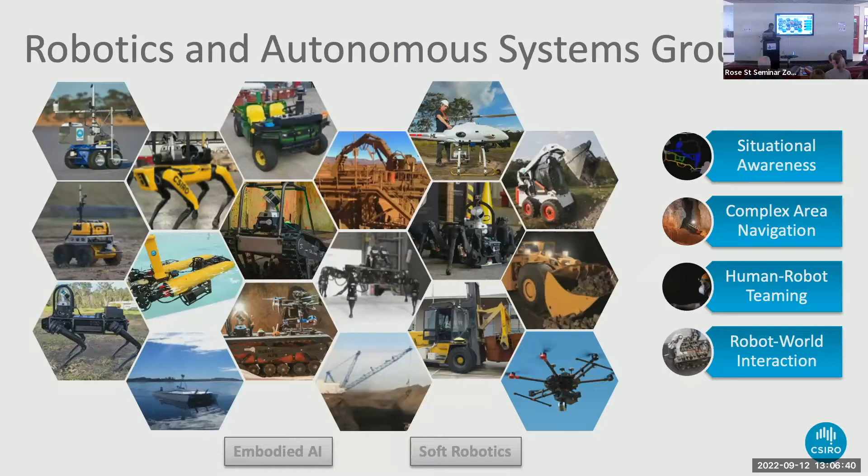So, topic of today - I'll start with explaining a little bit about what the DARPA Subterranean Challenge is for those who are not familiar, and about what we did and what we achieved, and a little bit about how we achieved all of that, and why it all matters.

The DARPA Subterranean Challenge, starting with DARPA - I'm pretty sure most of you are familiar, but I'll give the spiel that I usually do. DARPA is the premier defense research agency in the US, been around for quite a while, and known for quite some significant things. Back in the 60s, they invented the internet - I'm sure most of you have heard of ARPANET, that is before DARPA picked up the D in the acronym. More recently, in the last 2 decades, they started setting up some significant robotics grand challenges. The aptly named DARPA Grand Challenge back in the early 2000s was to send an uncrewed vehicle across the Mojave Desert. The team that won from Stanford got hired by Google, and that's what morphed into Waymo currently. So the whole autonomous vehicles industry was kickstarted through a DARPA challenge a while back.

Fast forwarding to 2017, the latest iteration of these challenges, called the DARPA Subterranean Challenge, or SubT for short, was announced. We put in a proposal and were successful in receiving funding to compete.

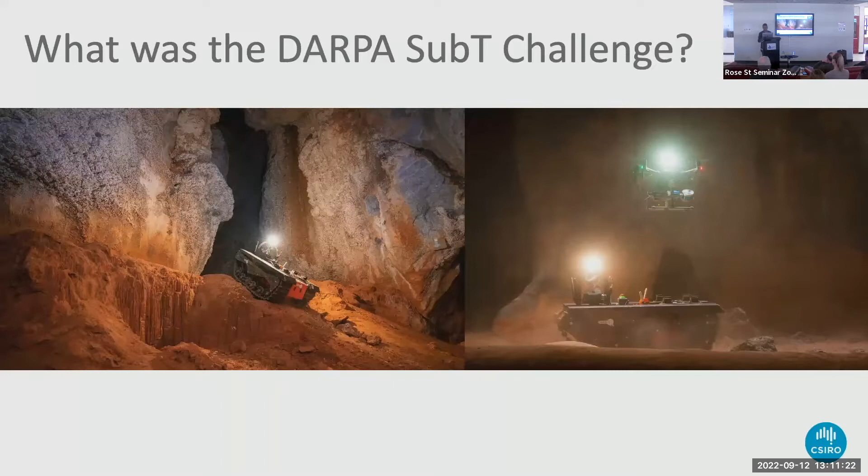So I'll play a quick video to give you an idea of what scoring a point was like in this challenge.

Here's how to win an event in the DARPA Subterranean Challenge: find the most artifacts in the shortest amount of time. When or if a team system locates an artifact, it has to report not only the type of artifact but also its spatially referenced location to an accuracy within 5 meters. A valid report earns 1 point, but teams are granted only a limited number of reports, so they can't just guess until they get lucky. Sound easy enough? Think again. Teams have to send their systems through dynamic terrain, over, under, and around obstacles, in austere navigation conditions, pushing the limits of their endurance, and in conditions degrading sensing capabilities and severely constraining communications. Teams will be permitted multiple timed runs through the course, but between each run the course can be changed — obstacles added, passages blocked or unblocked, and artifact locations changed. So teams need to be agile, adaptive, and accurate if they want to emerge victorious in the Sub-T Challenge.

So that gives you an idea of what was required. In terms of the environment, they divided it into 3 subdomains: first was man-made tunnels, like mining tunnels; second was underground urban environments — any built environment like a subway system, sewer system, or other industrial infrastructure underground; and the third was natural caves.

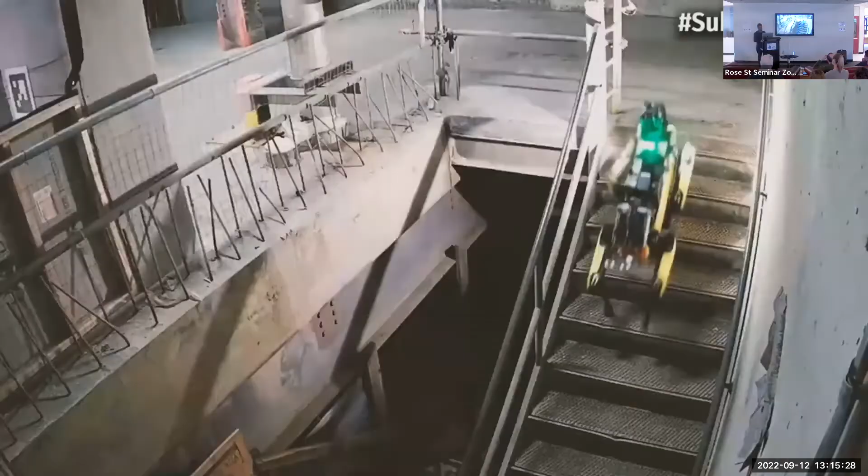We're in the Louisville Mega Cavern because it gives us a wide open canvas to paint our vision of what the Sub-T Challenge final event is supposed to look like, which is a mashup of 3 different subdomains: tunnel, urban, and cave. Each of the circuit events was focused on a particular subdomain, and that allowed teams to really zero in on what technologies work for that subdomain. The final event is about putting all of that together, bringing it into an integrated capability in that epic grand finale course. I should also mention they had 2 tracks, the systems track and the virtual track.

We participated in the systems track, where physical robots were deployed. The virtual track was all based on simulation. Some teams who participated in the systems track also participated in the virtual track, which we didn't.

What was interesting in the virtual track was that they had a series of different virtual environments, and teams had to deploy robots and perform well in each of the different scenarios. In the final of the virtual track, there was some Australian representation, not by us, but long ago, using our technology, we scanned the Jenolan cave system in New South Wales and made that dataset public. DARPA actually used that dataset to create a natural cave environment for the Sub-T virtual track, so all the teams from around the world sent their robots virtually into the Jenolan cave. Just pretty cool.

And to our team - this is just a subset of our team. We partnered up with 2 other institutions. Emesent, a drone autonomy company that our lab spun out about 3.5 years ago, based in Brisbane, provided drone autonomy. We also partnered with Ron Arkin at Georgia Tech in Atlanta, Georgia. As you can see from the list, the majority of the capability came from CSIRO, while Georgia Tech worked with us to develop a multi-agent coordination system.

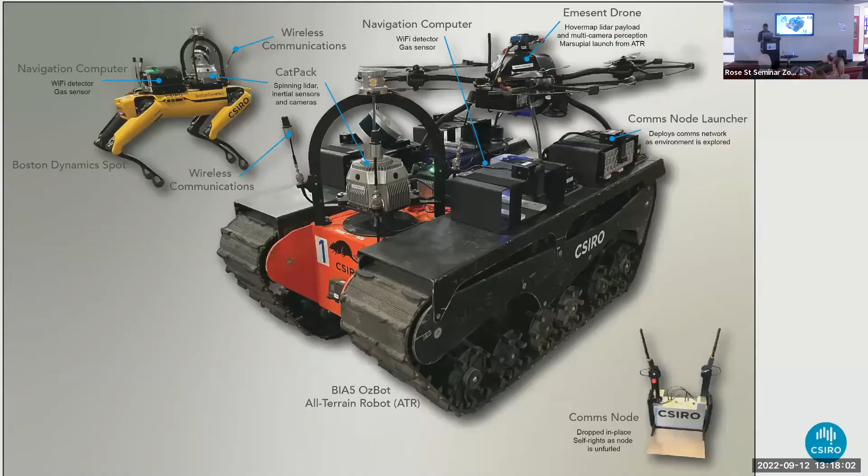This slide shows a little more of the hardware setup used. Each of the ground robots had the same autonomy and sensing payload, what we call the cat pack, with a spinning Velodyne and 4 RGB cameras at the base. That's where our SLAM system runs, processed in real time, including visual object detection. We also had carbon dioxide detection, Wi-Fi and Bluetooth detection, all incorporated into the system.

The other thing we had was droppable communication nodes, shown at the bottom right. These nodes could be carried on the back of the larger track robot - each could carry 4 of them to try to maintain a communication backbone as you enter the course. This video shows deployment of a comms node. Not very elegant, but if you wait, you see what happens: after a time delay, the ground plane opens up and the antennas pop out. Then you would have seen the drone being deployed from the back of the track robot as well.

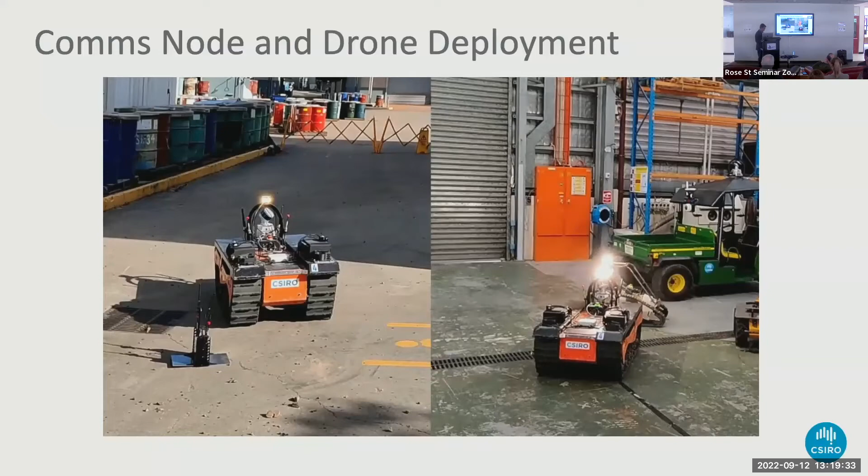So we competed over the 3 years. We got into the finals. We were all raring to go. But then due to COVID, CSIRO decided that it wasn't safe to send CSIRO staff over to the US in September last year, which was quite devastating for us, but that's what we had to deal with.

So within a very short period of time, we had to come up with a backup plan. We shipped our robots, and we had to train our subcontractors to use our robots. Mainly the Emesent crew was based in Brisbane. They weren't dealing with any of the UGVs at that time. They were only dealing with the drone part of the whole team of robots.

And then we got staff from the CSIRO US-based office. We have an office in California. It's not a research lab, it's mainly marketing and partnership staff, but they were really enthusiastic. They wanted to come and help the team, which was great. And then we were also fortunate to have a couple of our lab alumni who currently work in the US, who took leave from their day job and decided to come and help us, which was good as well.

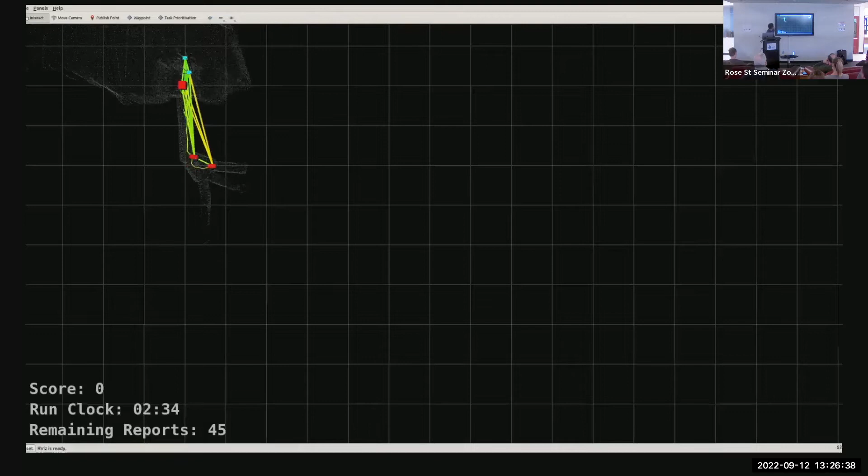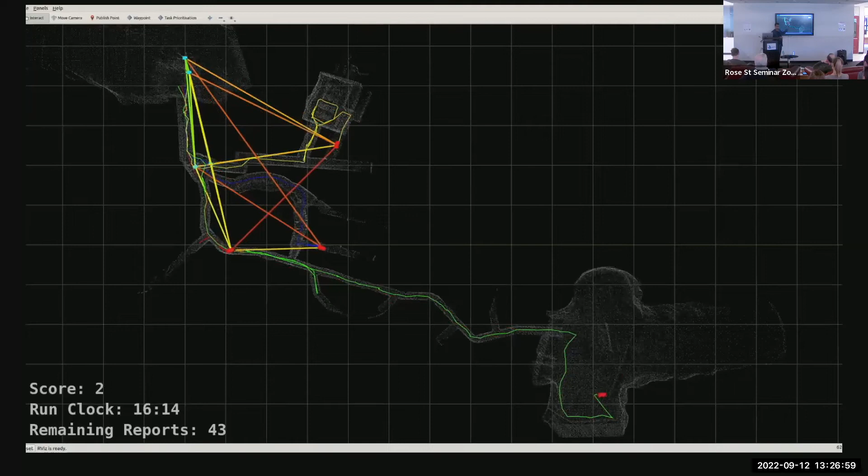Early in the phase, you'll see one of the legged robots, Bingo, making good progress into the course. But then it loses communication, and it's on its own doing a beyond-comms exploration mission. As far as the human supervisor is concerned, he has no clue what the robot is doing - as far as he's concerned, the robot is lost. But it's doing a pretty good job exploring the large cavern.

So this is the cave part of the circuit. The middle part is the urban, and the other one was the tunnel circuit. So this is a view from the base station.

Bluey - I do apologize for Bluey being yellow, which confuses things as well - but you'll see Bingo green in this view. So what about the physical scale, for example how far across? Each cell is 10 meters.

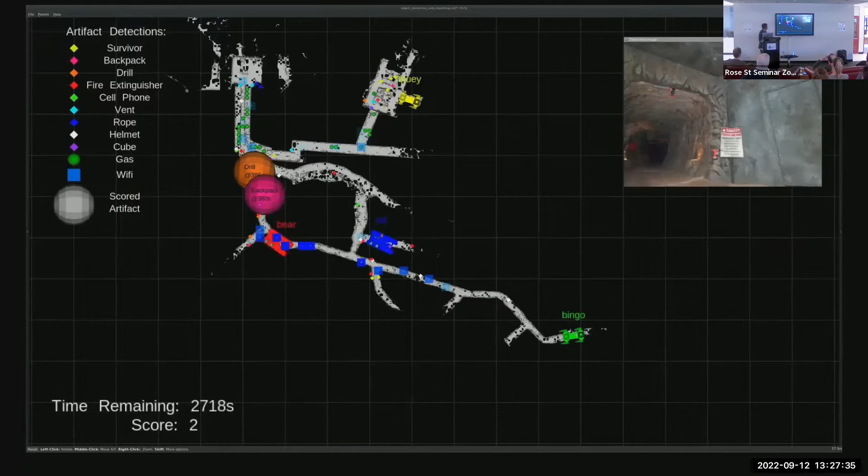So at this point, that's all the information the base station had received. Comms lost - as far as the human supervisor is concerned, he doesn't even know that part of the course exists. And this is what Bingo was actually doing.

This is from a DARPA camera that we received later on. It comes to an unfortunate end there.

It's beyond comms, but it has a lot of valuable information that it had collected - it has a bunch of detections. So that's where it is.

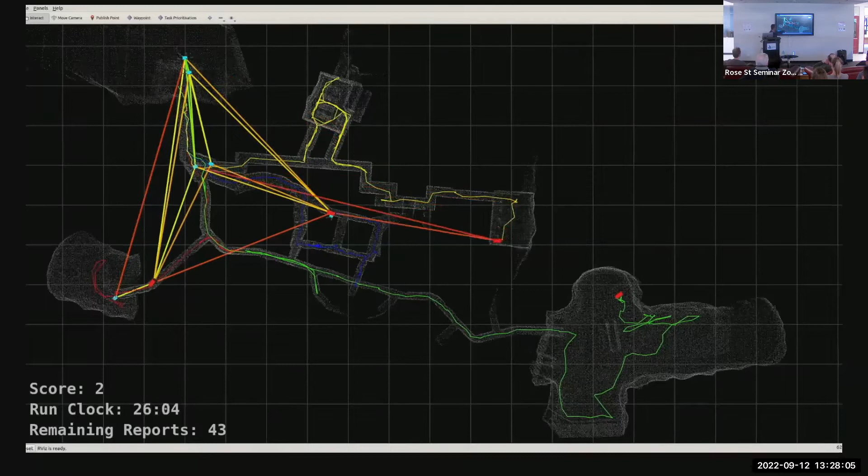And now that is Bluey, again beyond comms, doing a fantastic job exploring a subway station there. You'll notice something interesting happens with Bluey - very briefly it connects to Bingo, and then connects back to the base station. And suddenly we get all these circles back, and we now know that part of the course exists.

In the meantime, one of our big tracked robots, pardon the pun, got detracked on a rail track. So it's immobilized, it's blocking the path as well. It's got a drone on the back, and the drone is useless at that point as well.

Now, Bluey had met Bingo, collecting all the data, and makes a valiant attempt to get back to comms. But unfortunately, that too slips and falls beyond comms. At this point, we only have one mobile robot, which is Bear, which has a drone on the back.

At this point, the human supervisor knows where the disabled robots are, so he's desperate to send a robot to mule the data back. But this robot has a drone on the back, which makes it too large to fit through the narrow passages of the caves. So that's why he has to send Bear over.

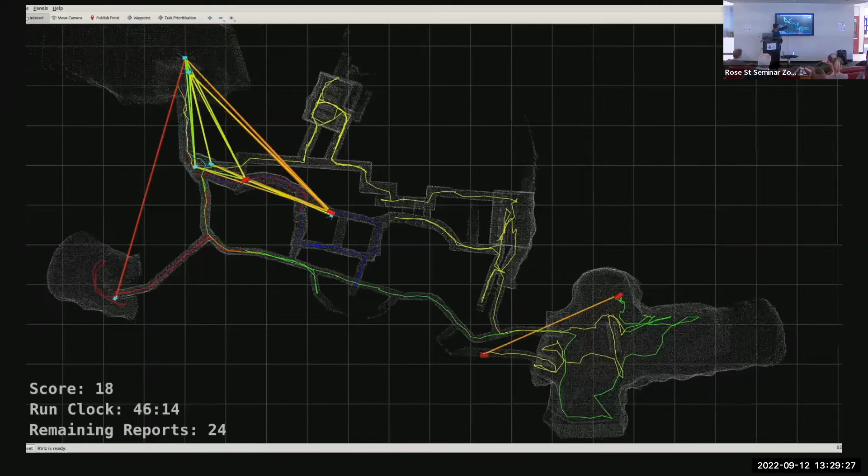So he tries to go through there, can't go through because Rat is blocking the way. Needs to come over here instead, because that's another large cavern, to deploy the drone and get the form factor small enough to fit through the narrow passage of the cave circuit.

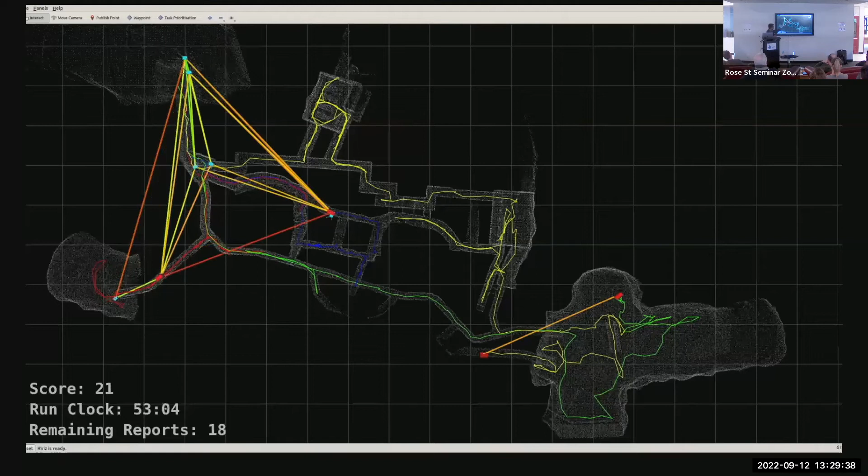And look at the time - we got less than 3 minutes at that point. It connects back and connects the data back to the base station. And we score the last point with 25 seconds to spare.

So you see the comms connectivity again. And this is the last minute at the base station. We got a pit crew of 10 who helps set up the robots, but after the setup time, when the timer starts, only one human supervisor, that's Brendan there, he's connected to the robot.

So look at the time. Notice around 25 seconds remaining, you'll see the score going up. And the other bit about the number of attempts, there were a total of 40 artifacts, but they only allow you 45 attempts, so you can't keep guessing. So we scored 23 points with 13 reports to spare.

What they didn't know at this time was we just tied for the top score. Because the teams are sequestered, the team didn't know what the top score was at that time. We knew because we were logged in from Brisbane.

And what was very frustrating for us is that we had 4 more accurate artifacts that were still streaming, which obviously we couldn't score. We had enough attempts left. So if we had another minute, not even a minute, maybe another 30 seconds, we would have scored 2 more points.

So I'll show you another video. This is from the GoPro footage on the 4-legged robots, just to give you an idea of what was going on and a sense of what the course looks like. So this is Bingo exploring beyond comms. And this is one of the special artifacts I didn't mention, called the DARPA cube. It was a glowing perspex cube to mess up any visual color-based object detection because it would change color constantly.

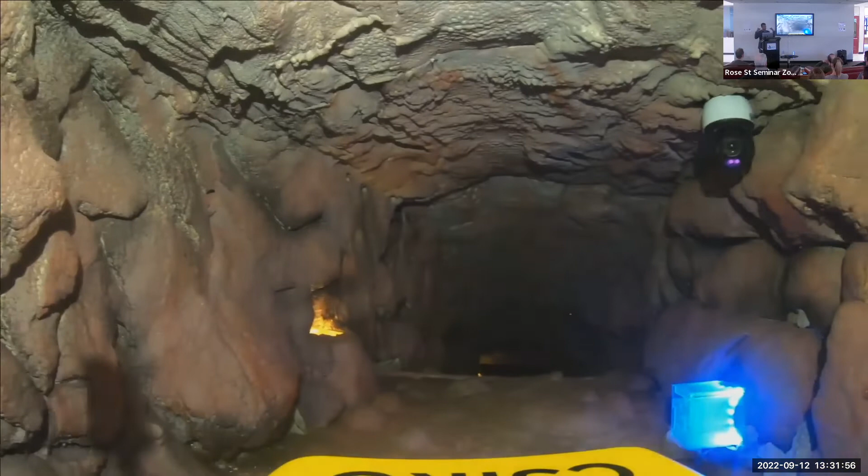So this is an autonomy behavior that we program into the robot. If our traversability estimation sees a gradient below a certain number of degrees, it'll turn the robot around and walk backwards. That's due to the morphology of the legs of the Boston Dynamics robots, because it's more stable going down a slope backwards, including stairs.

And this is a longer sequence of what you saw earlier. It actually digs up a power cable that DARPA had buried. I don't think DARPA intended for anyone to do that. It almost tripped, but didn't.

And if you notice, that's actually water, real water dripping down. And these robots are not IP rated, by the way. So we were pretty lucky that we didn't get water in any of the wrong places at that time.

As you can see, this is pretty challenging terrain, even for a human to walk on. And those robots are remarkably capable in terms of what they are and what they can do. And you'll see it struggles quite a bit before it comes to its sad end.

Because we didn't do anything with the low-level foot placement planning or the trajectory planning at the lower level, that's all Boston Dynamics. So what we did was at the higher level, we did our local path planning, global path planning, and the traversability estimation. And we managed to pipe the low-level sensors of the robots into our LiDAR-based map so that we could do seamless planning from near field to far field.

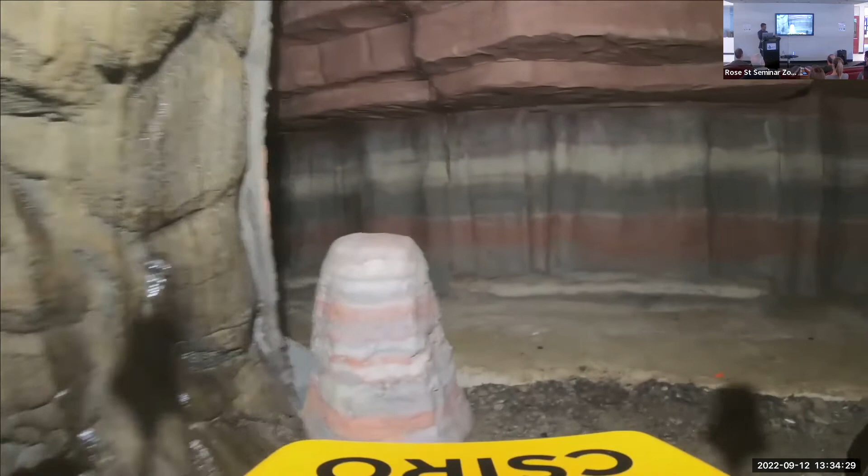And now this is Bluey. What, I mean, what was actually damaged? It wasn't damaged per se. It had the capability of standing up once it falls, but we intentionally disable that behavior because in some cases it would end up knocking the LiDAR around, and we didn't want to risk corrupting the map by having that self-right behavior.

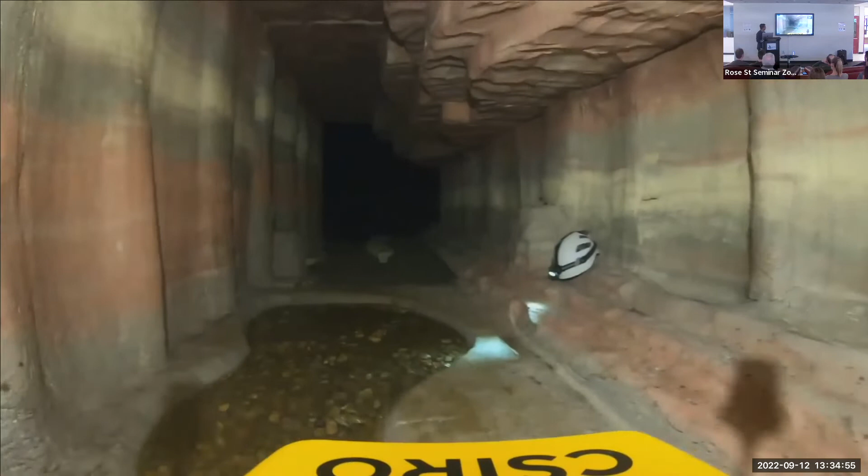Now this is Bluey, going through a puddle of water filled with pebbles. I think that was put in there to try and mess up LiDAR-based perception. Luckily, our SLAM system didn't seem to mind. And that's an artifact, that's the helmet, that's the type of stuff that we're supposed to detect.

And something pretty cool happens. If you observe, you'll see a bright light towards the left here. That's Bluey seeing fallen Bingo for the first time. So that's the light of Bingo, and that's that raised lip that it had fallen from.

And now this is Bluey valiantly trying to come back with all the data that it collected from Bingo. You'll see how difficult this terrain is. Notice the floor, it's not flat, it's sloped and slippery as well. And that's another rope, that's another artifact that we detected. And this is not someone joysticking the robot, this is fully autonomous traversal.

Yep, that's end of Bluey as well. Mind you, this is all man-made.

Just to give you an idea how good it was, DARPA spent over 3 years, $82 million US running the challenge. So they didn't spare any expenses doing this.

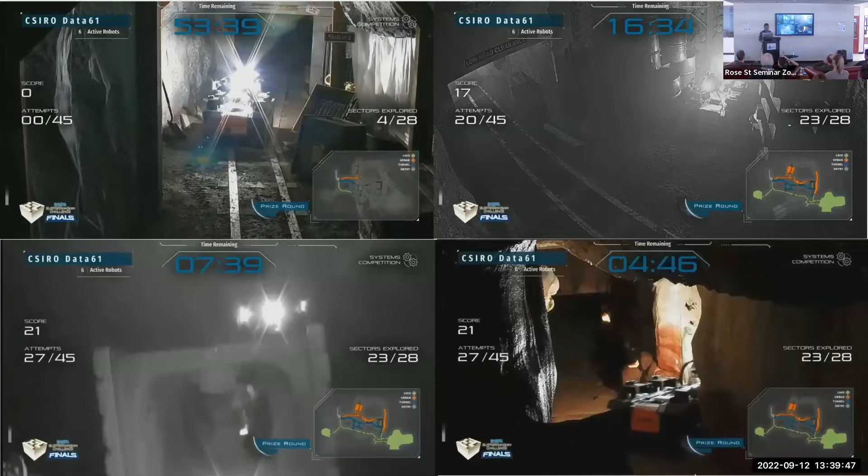Early in the piece, score 0, one of the robots going in. Score 17, that's where Bear was trying to go through, Brad was blocking the path, and that's another dynamic obstacle. That's something I forgot to mention, DARPA also had dynamic obstacles. So when a robot goes through a particular path, they had these things that would fall behind and block the path. It's not exactly trapdoors, but similar. And they also had a wire mesh that would act almost like a Faraday cage to block communication going through, as well as smoke machines. So when robots entered certain parts of the course, they would trigger the smoke machines and fill the whole segment with smoke. Yeah, they were nice to the robots.

And this is where score 21, 7 minutes to spare, that's when Bear launches the drone to get the smallest form factor to fit through the narrow gap. At this point, this was waypoint navigation with the human supervisor, just less than 5 minutes to spare, with the drone off the back, trying to get the robot as close as possible to the other robots. While it's being driven, you see it's throwing out a comms node as well as it goes.

The commentators that DARPA had there, they had some sports commentators commentating. There's another piece falling off the robot as it flies past. It was quite good.

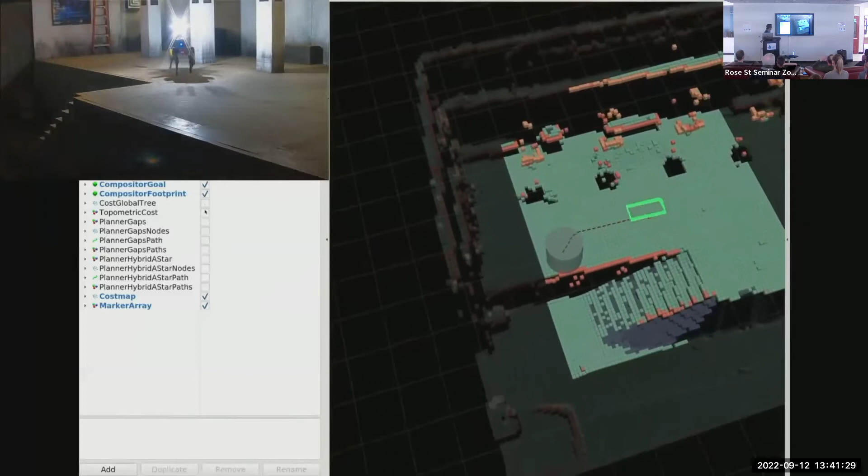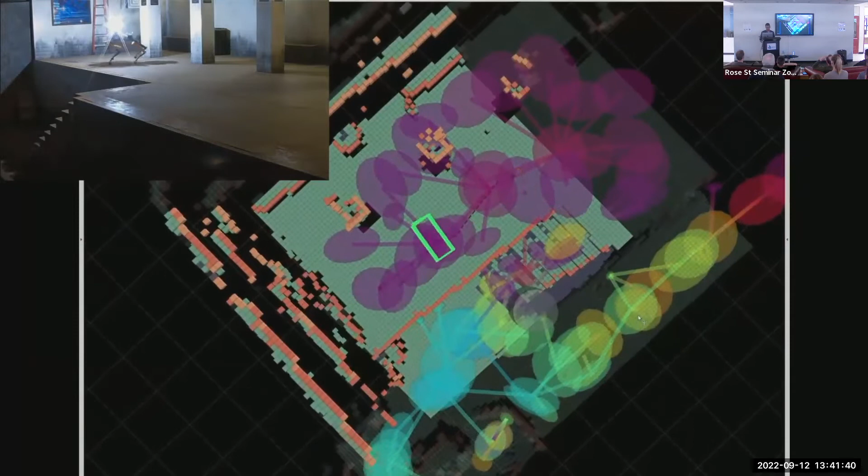And here we are turning on our topometric cost, or the cost-to-go map. This is coming from the global navigation graph that we have, and that shows the color. The color represents the cost to go from the current location to any one of the nodes of the graph. This is while doing a fully autonomous exploration mission. And here the robot turns around so that it can go backwards down the stairs, as I mentioned earlier.

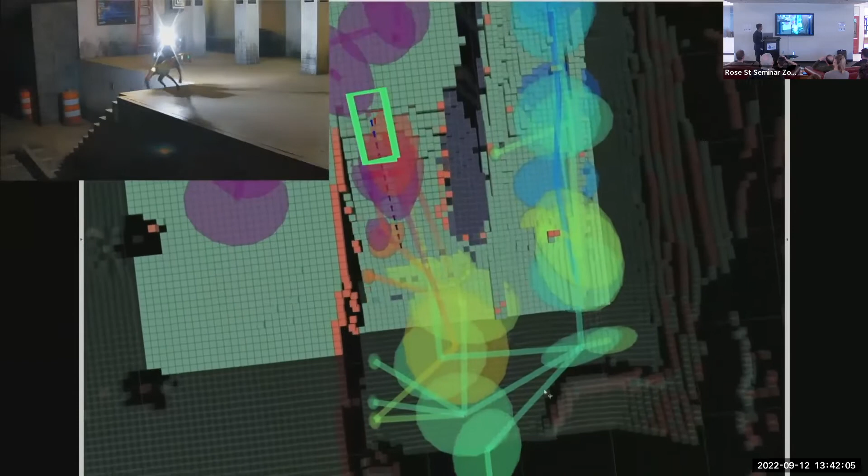So you see that it detects the edge of the steps as fatal, so that it doesn't plan across that.

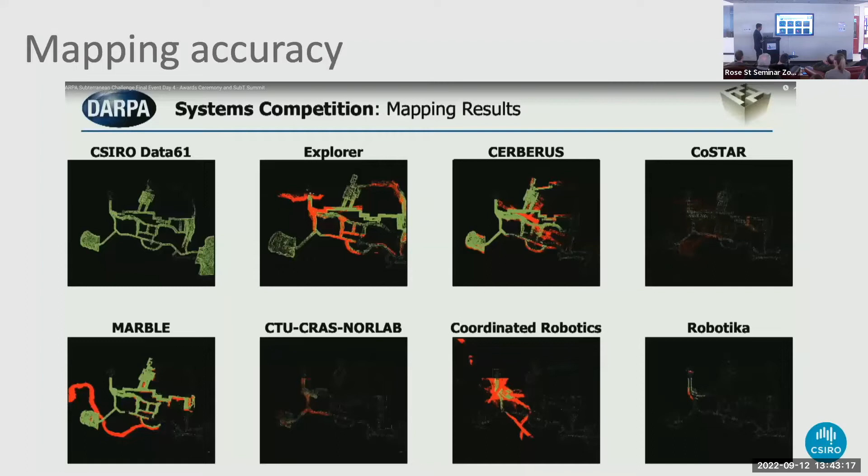And what this enabled us was also to win a superlative award for the most accurate artifact report. Here the error was 4.8 centimeters. To put things in context, we would have still scored that point if the error was 500 centimeters, because the allowed tolerance was 5 meters. So we were two orders of magnitude better than the requirement in this case.

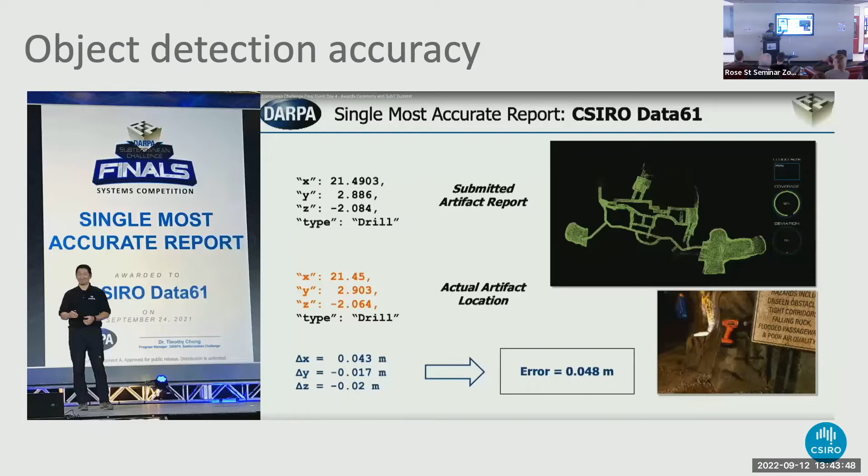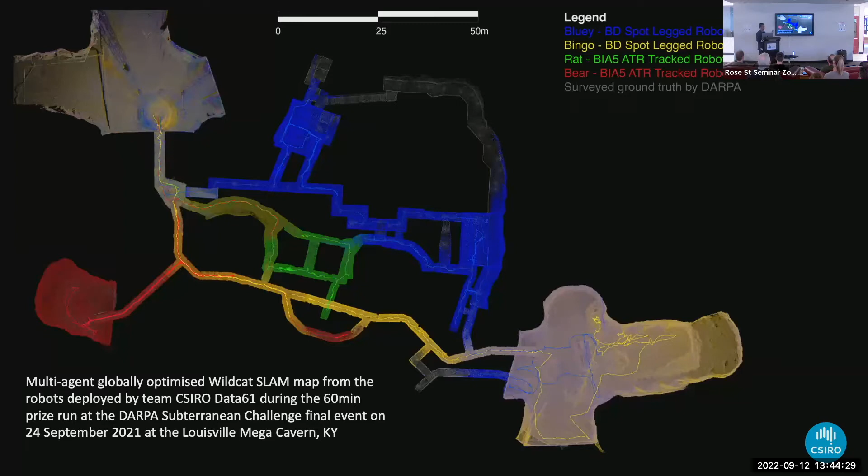And this is a 3D fly through of the same map. What was interesting was a few days after the competition, I got a call from a company called Leidos, a fairly large defense contractor in the US. They're the ones who've been contracted by DARPA to do the ground truth survey of the course. They told me that they spent more than 100 man hours surveying the course to get the ground truth. So they were asking, how in the world did you guys do it in less than an hour with a bunch of robots? Which was a good call to get.

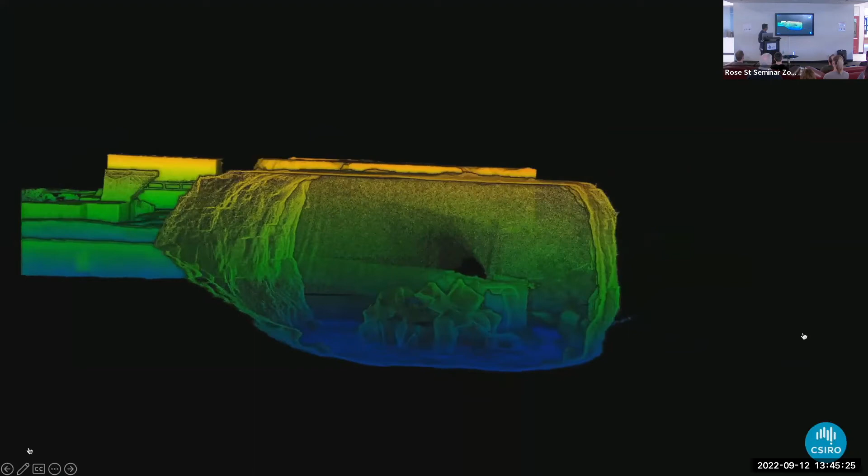Something that we also did was we colorized the point cloud in real time on the robots. But due to communication bandwidth constraints, we didn't send it back to the base station. So this is not photogrammetry - this is a LiDAR point cloud colorized with the RGB cameras that we have on the robots themselves. Each of the robots are doing it in real time, and that information was available in real time, but because of bandwidth constraints, we decided not to send it back to the base station.

Because in that way, we could actually very clearly see the artifact locations as well. Is the artifact identification just visual, or is there a particular criteria or multiple criteria? Mostly it was visual, but there were some artifacts like carbon dioxide concentrations and mobile phone detection using Wi-Fi and Bluetooth. So we had to have those additional modalities, but majority of them were detected using RGB.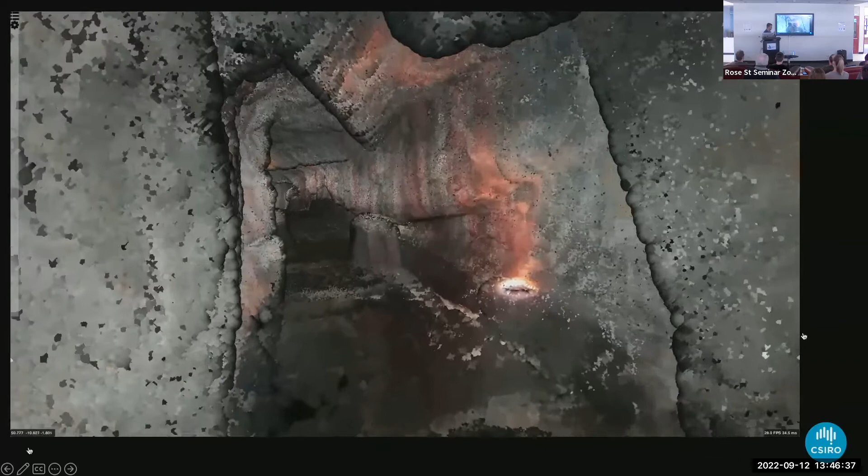We didn't use the point cloud to detect the artifacts per se, but we used the SLAM-based localization to do tracking of the object to improve the accuracy of the object detection. Because each robot would have multiple viewpoints of the same object and multiple robots might see the same object. The architecture we had was once an object is detected, the report will be sent back to the base station and the human supervisor has a chance to verify that before sending it to the DARPA scoring server - then we immediately know whether you scored a point or not. We didn't want to bombard the human supervisor with tens and thousands of detections, so having that object tracking really helped us prune down the number of candidate object reports that were coming through.

The CO2 identification is an interesting one - I guess you have to integrate it with some kind of sensor. Yes, so we used a CO2 sensor, but that too we used tracking because we had to keep track of the concentration going up. So we made the decision where you get the peak of the gradient, that's where you would report.

So the rules meant that they would have carbon dioxide released in an enclosed area, and as the location we had to report the center point of the entrance of that area. So if it's a room, we had to report back the location of the door if you detect CO2 in a room.

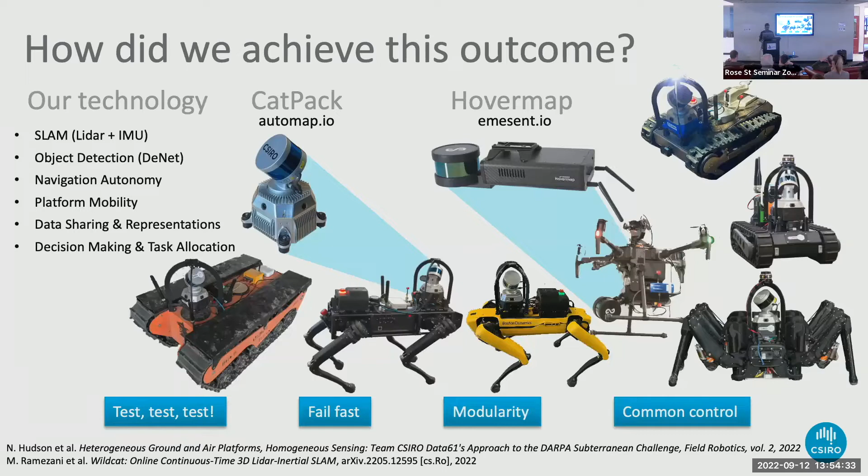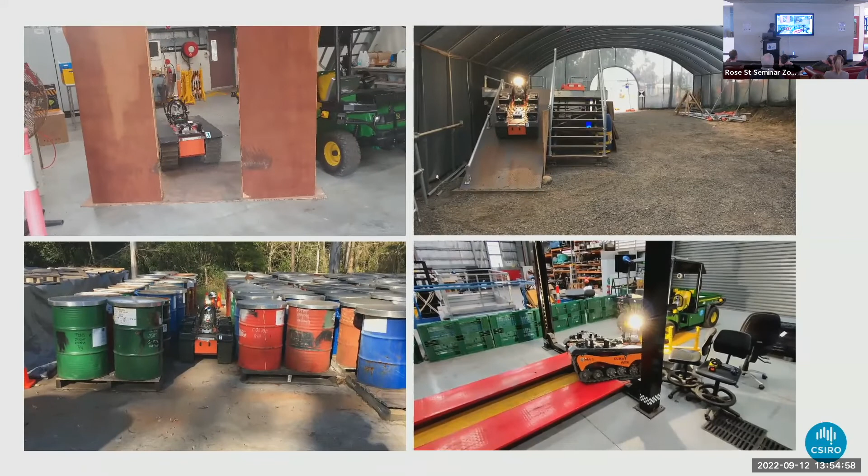In terms of testing, we are lucky to have a really great site up in Brisbane, which has a fair bit of industrial setting there. We also built 300 meters of shade cloth tunnel just for the purpose of testing our robots for sub-T. These are the environments where we did our testing.

This is fully autonomous, going through a narrow gap. This is something that I'm very fond of—having a robot go through a narrow gap with 2 centimeters tolerance on each side. That was pretty special.

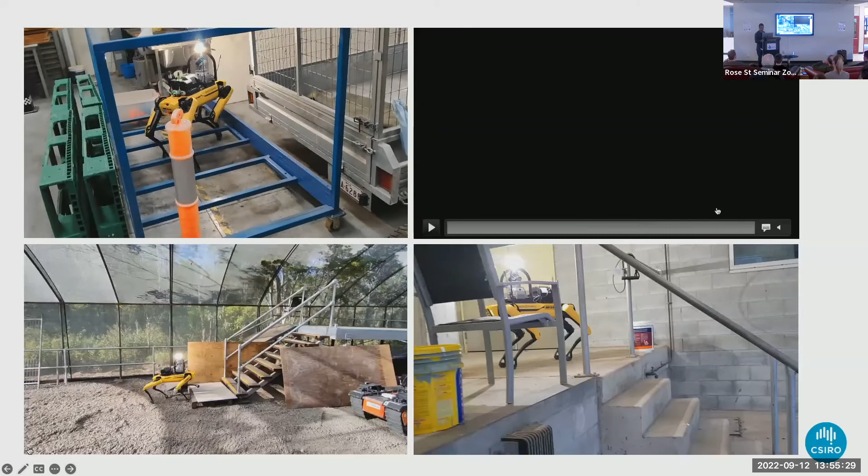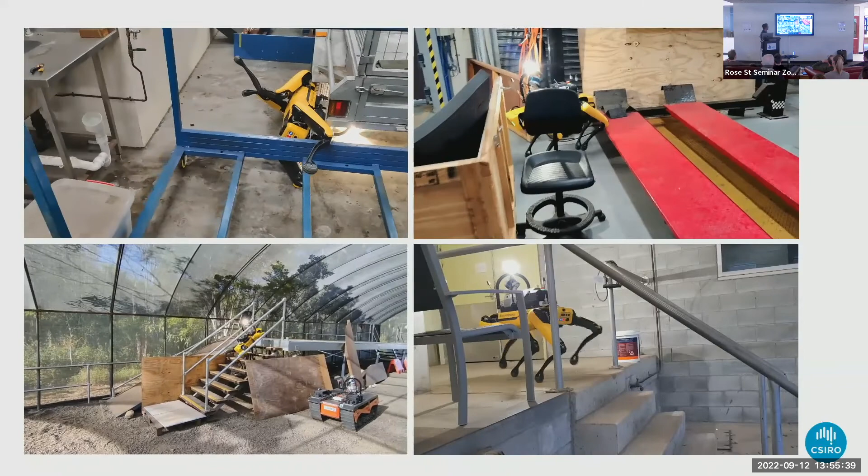And we were very nice to our legged robots when it came to testing. But as you saw, all this testing really helped in the end.

So why does this all matter? For us, it's not a CSIRO robotics group win or even a CSIRO win. I think this is really considered an Australian win, because we got a chance to showcase Australian field robotics capability at a global stage and shine a spotlight on it. And we also have matured and commercialized some of this technology.

The next cab off the rank is the multi-robot navigation stack, which I'm actively working on currently to set up an early adopter program, because we've got a fair bit of industry interest in getting their hands on it.

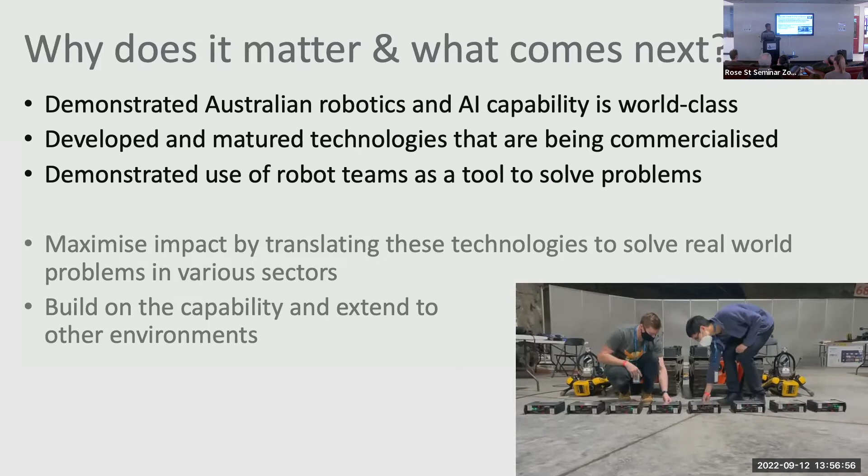The other really interesting one is the third point, which is an aspiration goal for us as well: to have this concept of not just one robot, but a whole team of robots as a tool that can be deployed to solve problems in many different domains, where all you need to know is how to use the tool, not to build the tool. I think there's a big difference there. So we could have a future where non-roboticists deploy not just one robot, but a whole team of robots to solve problems.

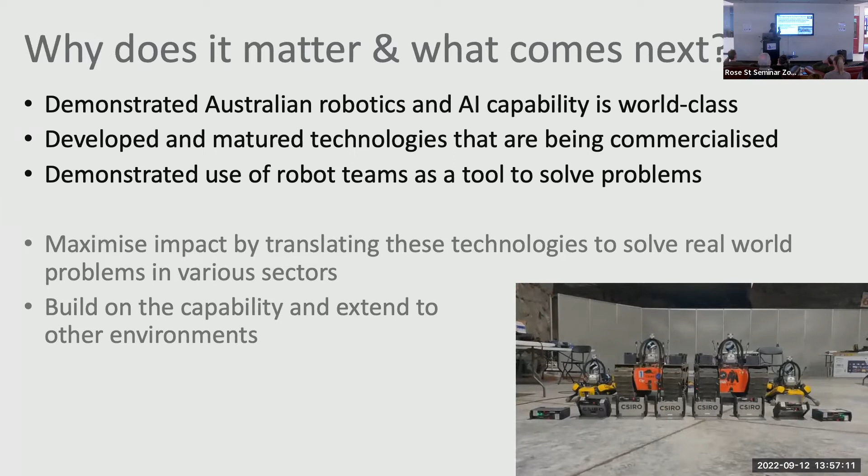We are also pretty keen on using this technology as a baseline and then building upon it. That's where we are currently actively working on sending these robots into natural environments, and natural environments come with their own challenges. In the sub-T domain, most of the environment was static, and we didn't have mixed environments—we didn't have to deal with humans in the course. Yes, there were dynamic obstacles, but they were not constantly moving. In the natural environment, everything moves, nothing's rigid, nothing's flat. So that makes it very challenging.

The other thing that we've done is we've moved into field mobile manipulation. So we put arms on the back of our robots, and we're trying to do things like moving branches out of the way to navigate, pushing obstacles out of the way, and things like that, which is quite exciting.

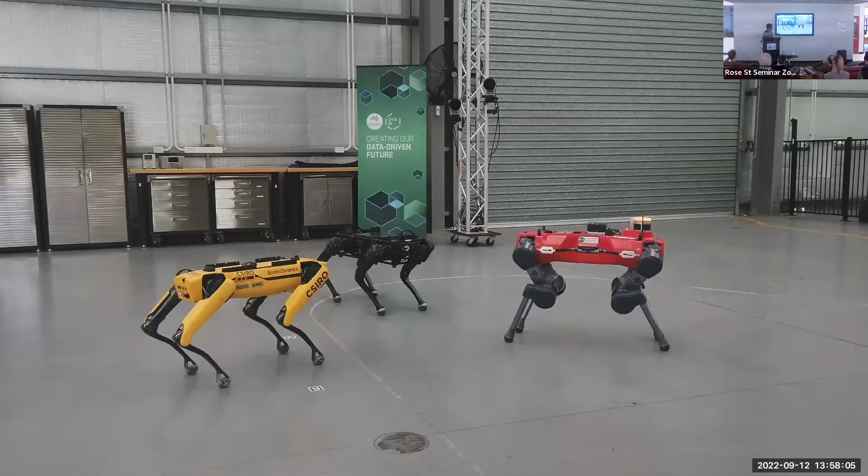The other thing that we did was, because the team that beat us had those robots, we wanted to know what's so special about it. So we bought one, and currently we're playing with it. That's ANYmal from ANYbotics, a robotics company spun out of ETH Zurich. I do have a grudge against them because they just hired our top electronics engineer early this year as well.

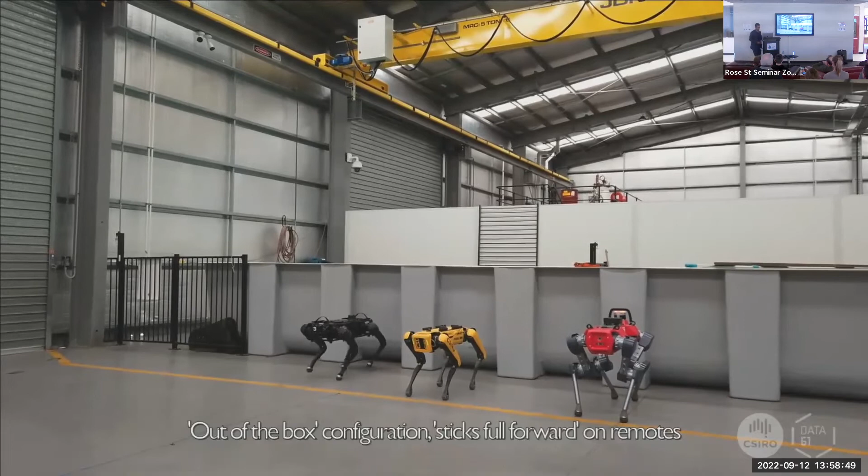But we decided to do a bit of a test racing these robots. So that's a Ghost Robotics quadruped as well. 3, 2, 1, go! So this was an out-of-the-box config, sticks full forward, nothing special.

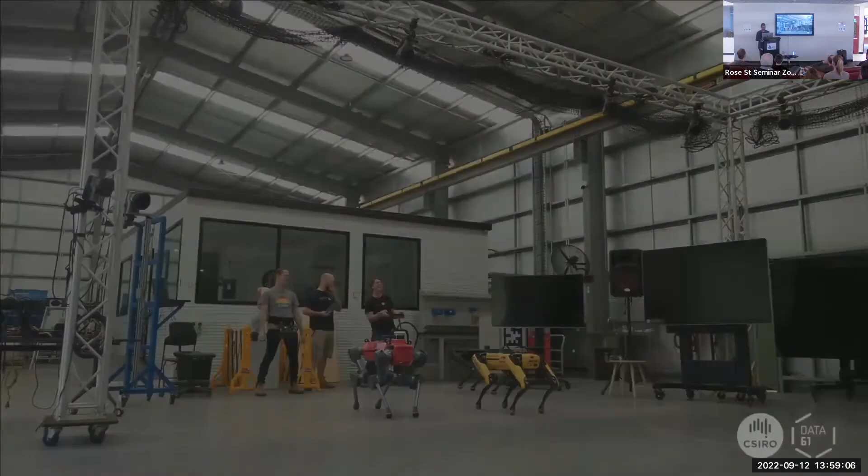We realized that the Ghost robot has an interesting momentum-based controller—so even if you let go of the stick, it actually keeps going.

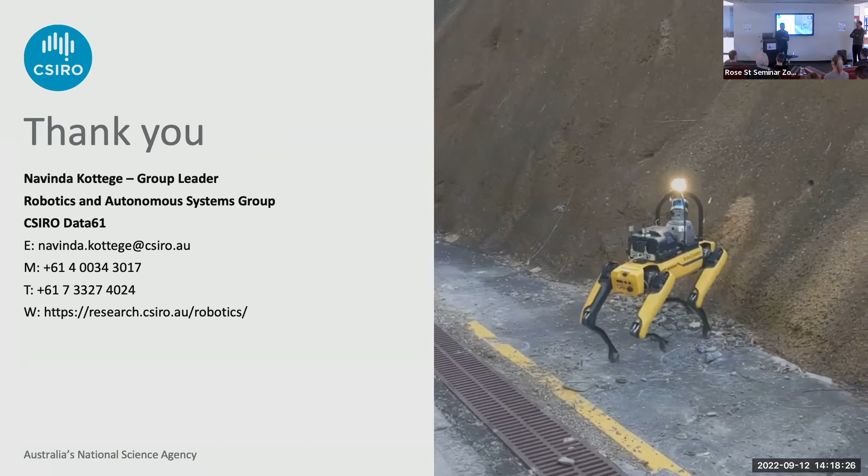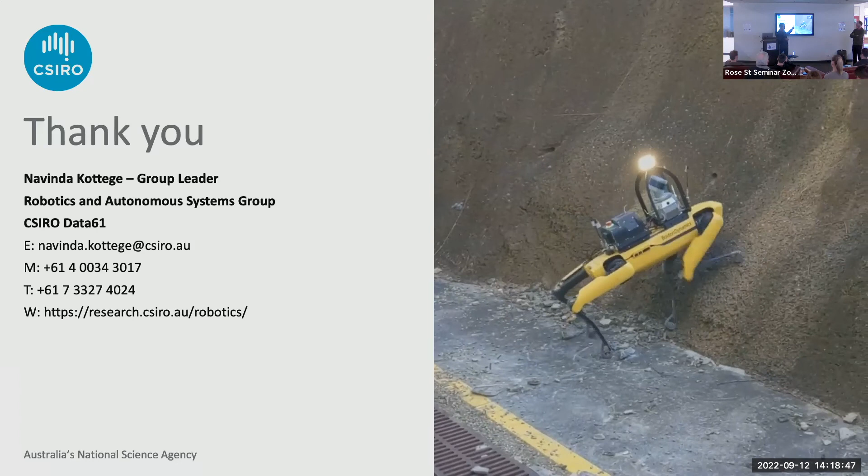If we had another maybe 5 years to mature that platform, yes, it could have been competitive against that sort of robot. But in the end we had to make the call, because we knew it was not going to win us points compared to the other commercially available platforms. At the beginning, 3 years ago, this wasn't commercially available -- we couldn't buy it. But last year, we could. So we actually bought this in April last year, and we competed in September.

We managed to fully integrate our software stack and test in less than 2 months, which is huge. Whereas the previous one that we used was the Ghost Robotics quadruped, and the timeline was around 6 months where we got to that point with that robot.

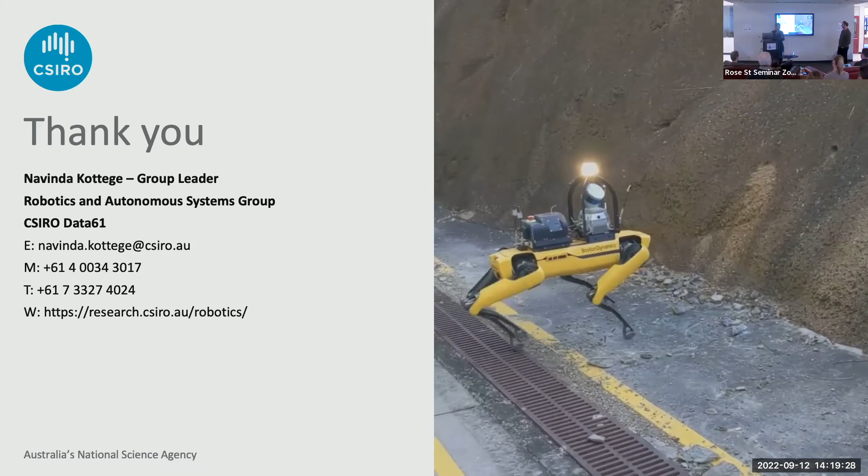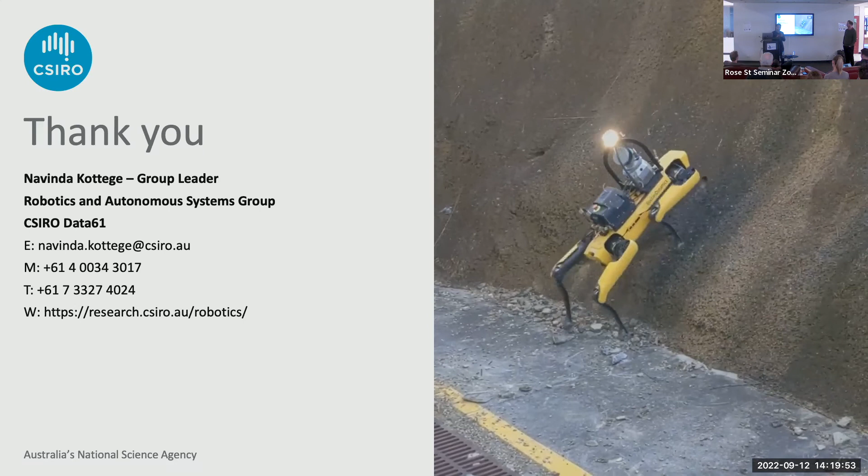Before I finish, one last thing I forgot. The project cost for the 3 years for what we did was $10 million US. Out of that, 4.5 million came from the US government, from DARPA, and 5.5 million came from CSIRO co-funding. At the end of it, we won $1 million US as prize money, and it was recently announced, so it's public. We ended up using that money to set up a scholarship, a PhD scholarship fund with QUT, targeting females and candidates from underrepresented communities to study robotics. So that's what we did with the prize money.